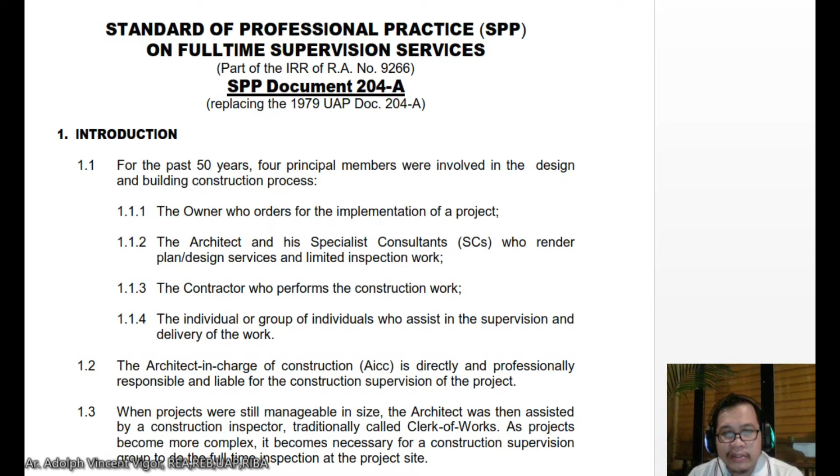So when projects were still manageable in size, the architect was assisted by a construction inspector, traditionally called the clerk of works. As projects became more complex, it became necessary for a construction supervision group to do the full-time inspection at the project site. The construction supervision group is normally recommended by the architect based on their performance and hired by the owner. So they are answerable to both the owner and the architect.

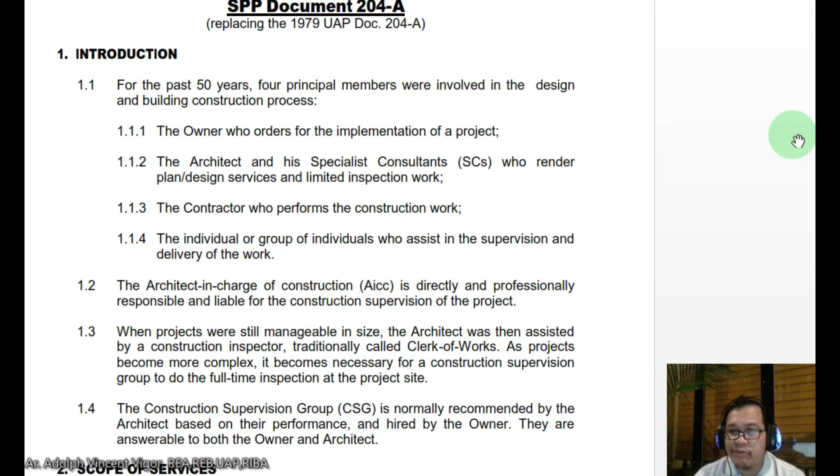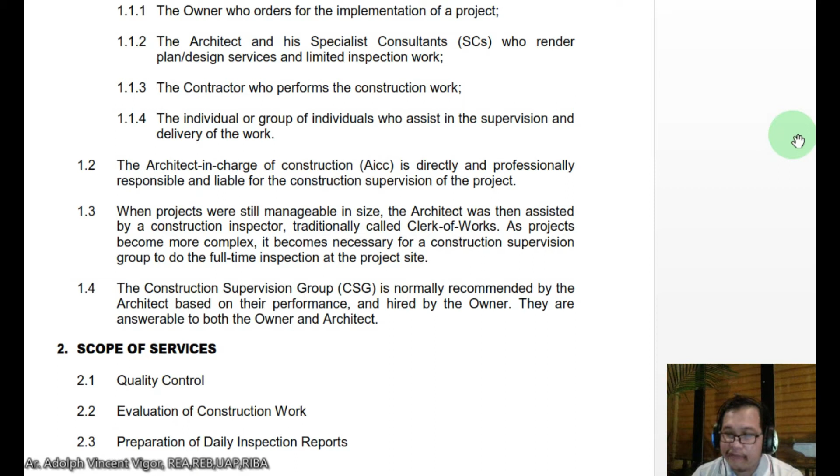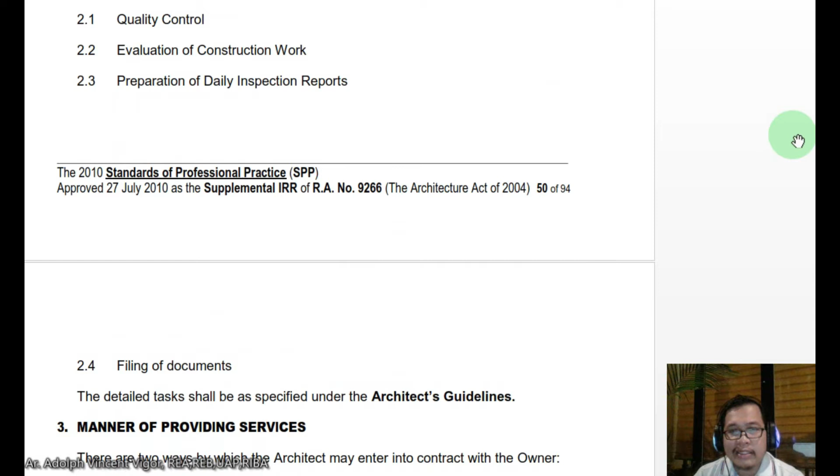So for the scope of services under this SPP, you have quality control. So when you say quality control, as the architect, of course, you're going to check if everything is in accordance with the plans, designs, and specifications. Then evaluation of construction work, preparation of daily inspection reports, and filing of documents. So the detailed tasks shall be specified under the architect's guidelines.

So for the manner of providing services, there are two ways by which the architect may enter into contract with the owner. So the first is working in a dual capacity as the architect of record and as consulting architect for full-time supervision services or as the construction supervision group.

So as the architect of record of the project, the AOR is in a better position to interpret his drawings and documents and to assure conformity by the contractor. So it can assign staff to undertake the full-time supervisory work to perform the works as enumerated in the architect's guidelines. And the second is working as a consulting architect for full-time supervision services only or as the CSG.

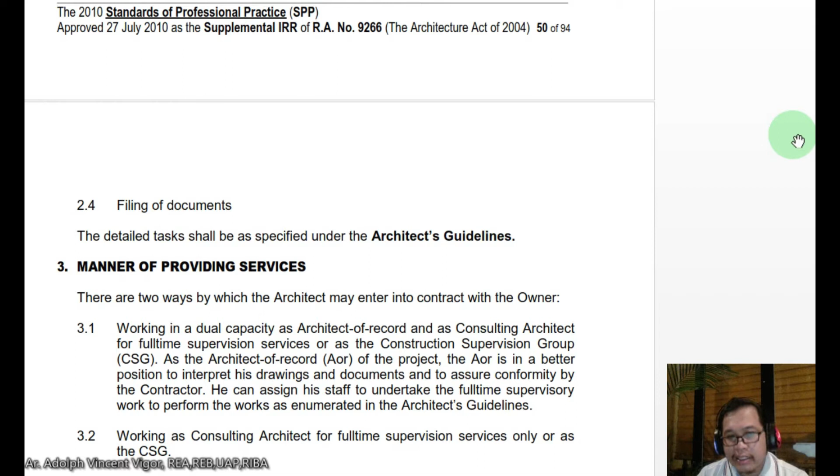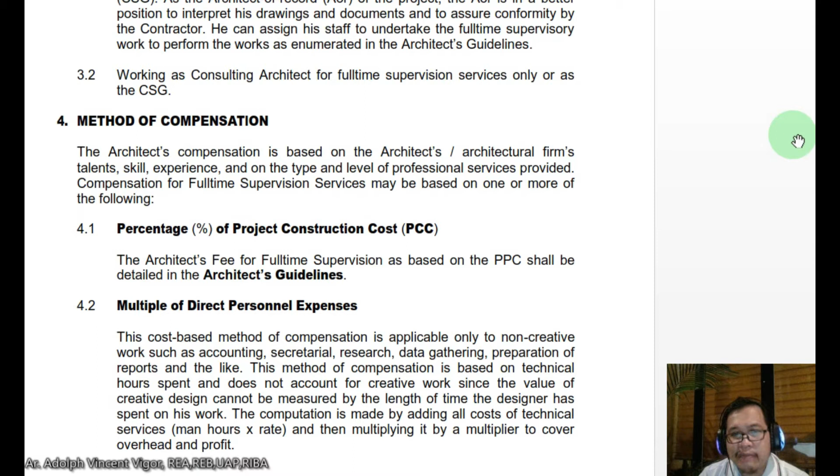So for the methods of compensation, the architect's compensation is based on the architect or the architectural firm's talents, skills, experience, and on the type and level of professional services provided. Compensation for full-time supervision services may be based on one or more of the following. So for point one, it's a percentage of project construction cost or PCC. So the architect's fee for full-time supervision based on the PCC shall be detailed in the architect's guidelines.

The next is multiple of direct personnel expenses. So this cost-based method of compensation is applicable only to non-creative work such as accounting, secretarial, research, data gathering, preparation of reports, and the like. So the method of compensation is based on technical hours spent and does not account for creative work since the value of creative design cannot be measured by the length of time the designer has spent on his work.

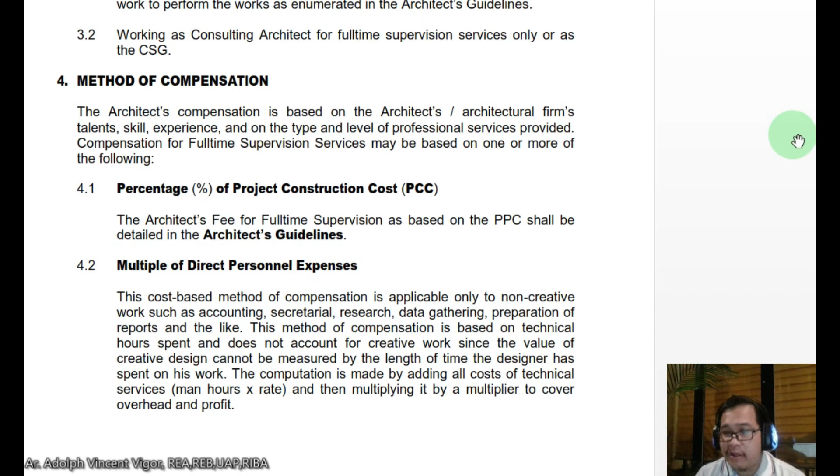So the computation is made by adding all costs of technical services, so that's man hours times rate, then multiplying it by a multiplier to cover overhead and profit. So as we have explained in the earlier lectures, the multiplier ranges from 1.5 to 2.5 depending on the office setup, overhead, and experience of the architect and the complexity of the project.

So other items such as cost of transportation, living and housing allowances of foreign consultants, out of town living and housing allowances of the local consultants and the like are all to be charged to the client. At the start of the commission, the architect shall make known to the client the rate of professionals and personnel who will be assigned to the project and the multiplier that has to be applied for agreeing on this method of compensation.

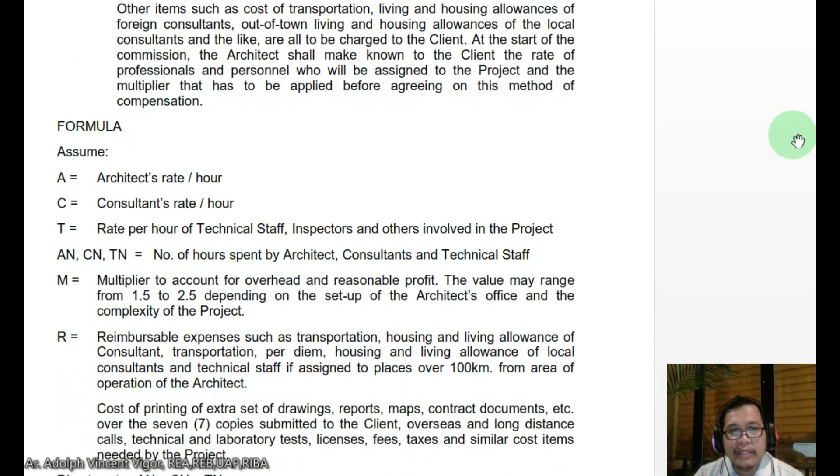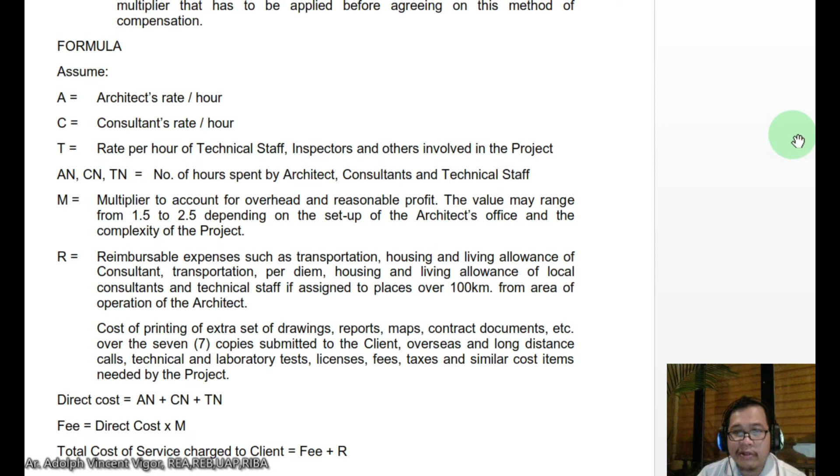Okay, so this is the formula. We have already discussed this in the earlier section, so we'll only touch a little bit of it. So for the direct cost, you have AN plus CN plus TN. Then for the fee, you have direct cost times the multiplier. Then the total cost of service to the client is your fee plus R.

Okay. You could also go for professional fee plus expenses. So this method of compensation is frequently used when there's a continuing relationship over a series of projects. It establishes a fixed sum over and above the reimbursement of the architect's technical time and overhead. So an agreement on the general scope of the work is necessary in order to set an equitable fee.

Then you have the lump sum or fixed fee. So this method may apply to government projects since they entail more paperwork and time-consuming efforts. Then you have the per diem, which is honorarium plus reimbursable expenses.

So in some cases, a client may request an architect to do work which will require his personal time, such as attending project-related meetings, conferences, or trips, conducting ocular inspection of possible project sites, and conferring with others regarding prospective investments or ventures and the like. So, for these particular activities, the architect, as the agent of the owner, may be paid on per diem and honorarium basis, plus out-of-pocket expenses, such as but not limited to travel, accommodation, and subsistence.

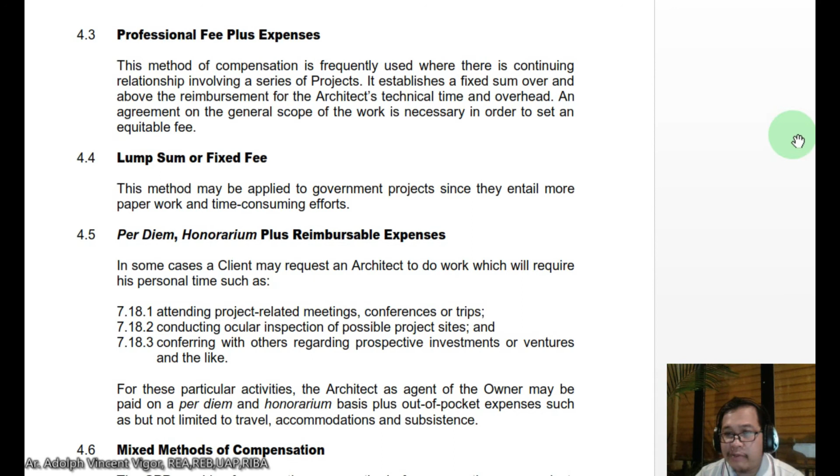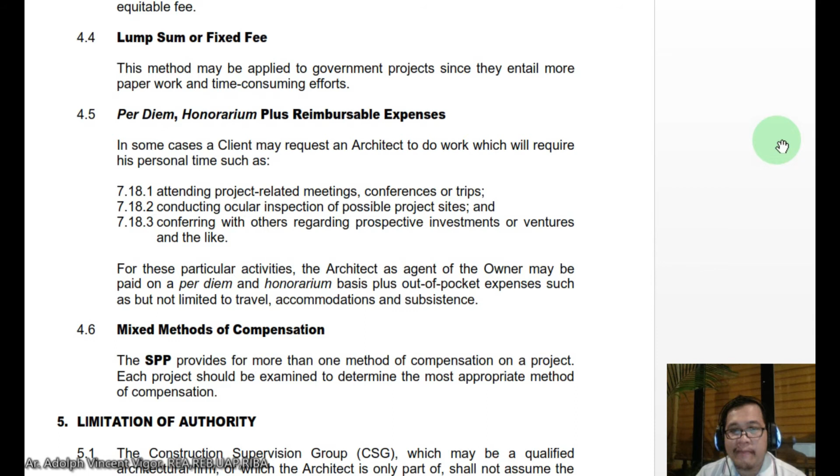Then you could also go for the mixed method of compensation. So the SPP provides more than one method of compensation for a project. So each project should be examined to determine the most appropriate method of compensation.

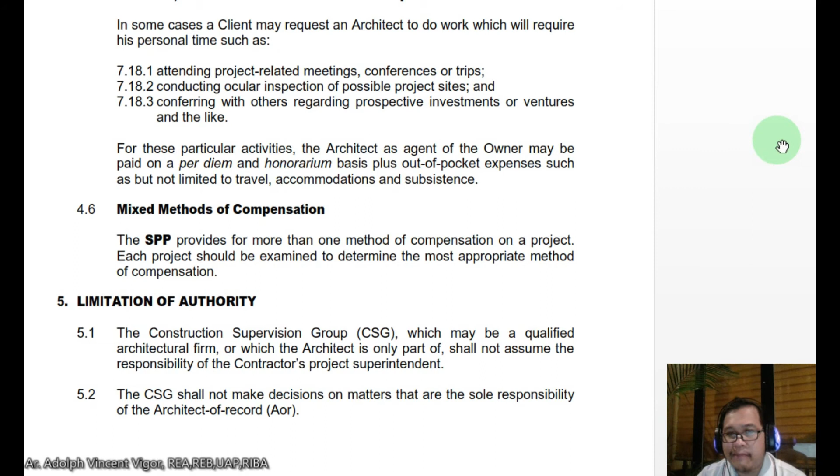Okay. But there is a limitation of authority. One is that the Construction Supervision Group or CSG, which may be a qualified architectural firm or which the architect is only part of, shall not assume the responsibility of the contractor's project superintendent. Then the CSG shall not make decisions on matters that are the sole responsibility of the architect of record. So if you're the architect of record, class, your authority is above the CSG since you are the designer.

Now for the legal responsibility, the construction supervision group is responsible to the owner only for administrative matters. For technical matters, the CSG is responsible to the architect of record. So what's the responsibility, class, of the CSG to the architect of record? So the CSG is responsible for making sure that the project is being implemented in accordance with the plans and specifications prepared by the architect of record.

Okay, so under Article 1723 of the present Civil Code, the CSG may appear not to have any legal responsibility since the architect of record and the engineers of record are responsible for the design while the contractor is responsible for the construction. However, a service contract agreement between the construction supervision group and the owner may stipulate certain professional responsibilities and civil liabilities of the CSG, particularly if the CSG is party to the review of the contract documents and their subsequent evaluation and interpretation during the course of construction.

So what does this mean, class? Under normal circumstances, the legal responsibilities fall to, of course, the AOR, architect of record, and the engineers who are involved in the project. However, there should be a separate service contract agreement between the owner and the CSG, which stipulates their professional responsibilities and civil liabilities, especially if the construction supervision group is also part of the team which reviewed the contract documents.

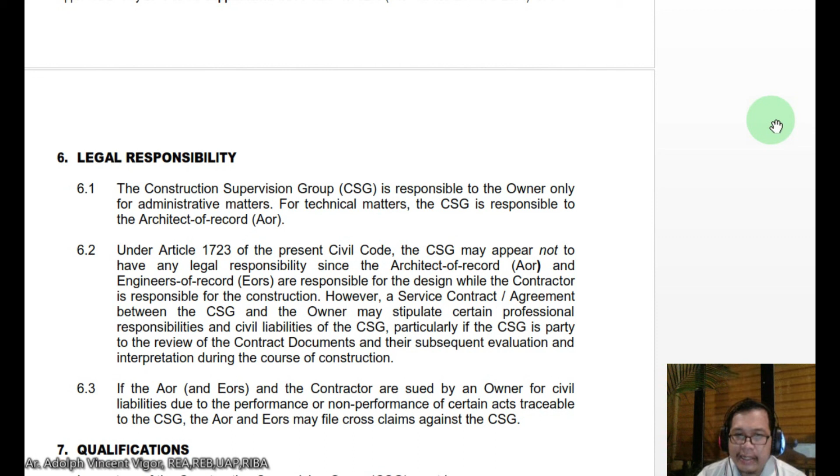So the next is if the AOR and EOR and the contractor are sued by an owner for civil liabilities due to the performance or non-performance of certain acts traceable to the CSG, the AOR and EORs may file cross claims against the CSG. So the third statement is what will happen if the owner sues the architects and the engineers. So the architects and the engineers of record can also file a cross claim against the CSG or the construction supervision group.

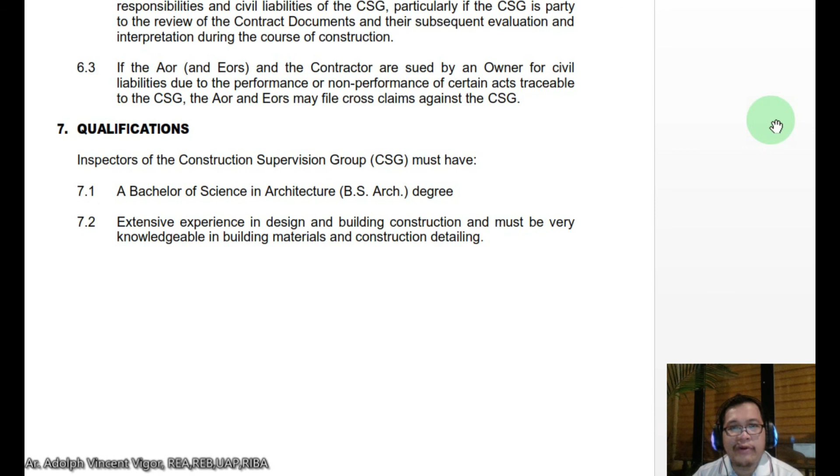So these are the qualifications of the construction supervision group. Number one, should have a Bachelor of Science in Architecture degree, and two, have extensive experience in design and building construction and must be very knowledgeable in building materials and construction detailing. Okay, so this is for UAP SPP document 204A. So next week we're going to discuss 204B.